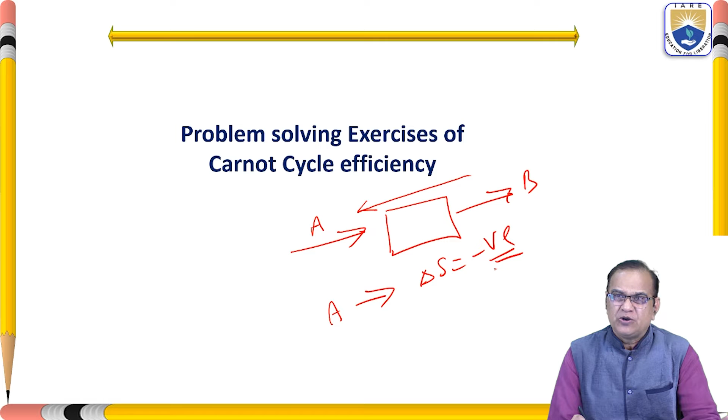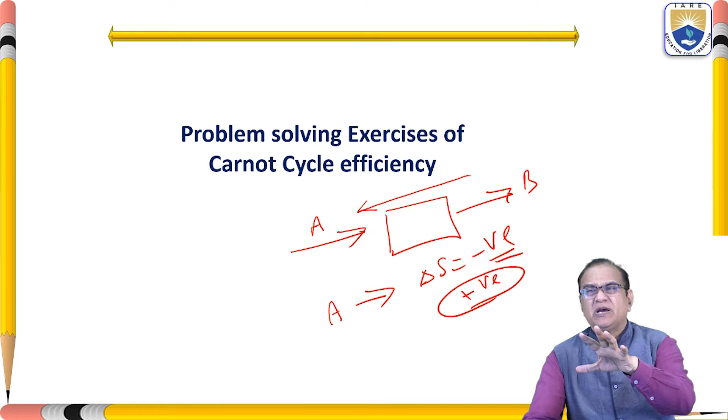So this we have seen with the help of the numerical, that the process was not possible from A to B, but it was very much possible from B to A. In this way, we have seen it in our previous lecture.

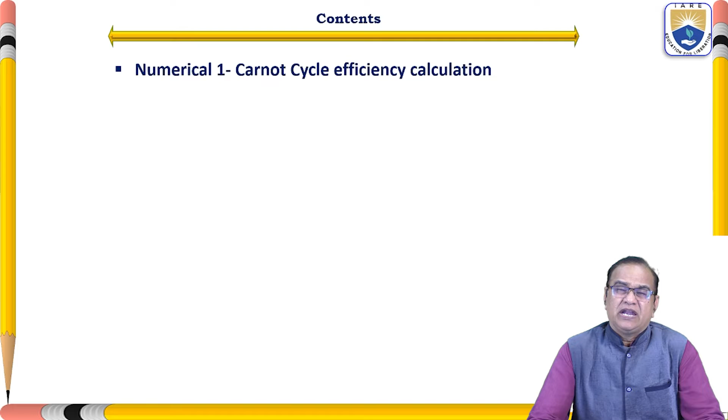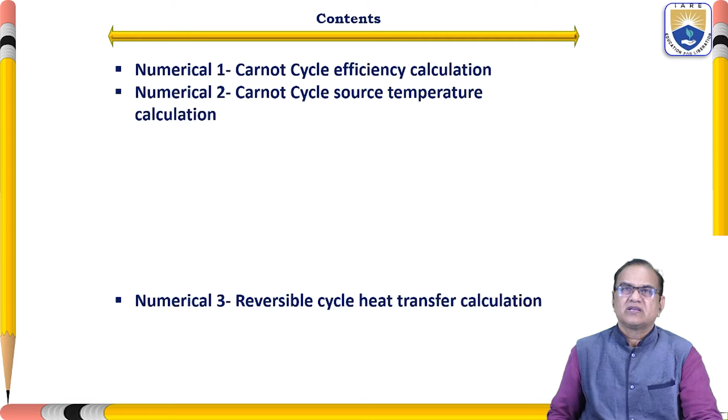In today's class, we are going to discuss some numericals again. Numerical number 1 is about Carnot cycle efficiency calculations. Numerical 2, Carnot cycle source temperature calculation. Numerical 3, reversible cycle heat transfer calculation. Numerical 4, refrigerator coefficient of performance calculation.

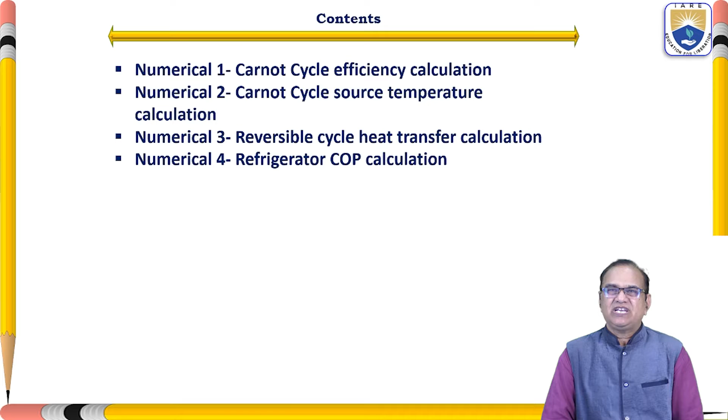So here we have the Carnot cycle for the engine and the Carnot cycle for the refrigerator. And we will see how these things are varying, and very interesting thoughts will be coming up in this lecture. Hope you will enjoy and stay tuned for this lecture.

So this is numerical number 1. An engine works on a Carnot cycle; it rejects 30% of the heat it absorbs from the source. The sink is at 25 degrees centigrade. Calculate the source temperature and the maximum efficiency. Okay, so it is very interesting. So this is the source and this is the sink here.

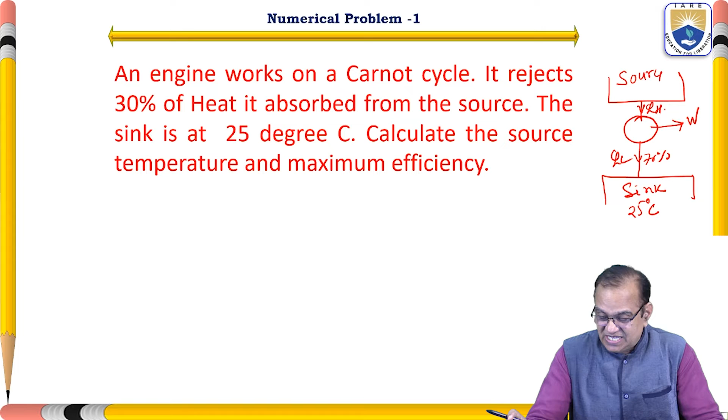So we have to calculate the source temperature and the maximum efficiency, assuming a Carnot cycle. So first we will see the diagram again. This is the source. Taking the heat from the source is called QH, and this is the engine. This is QL, and the sink is given as 25 degrees centigrade. So for the Carnot cycle, we can write that QL by QH is equal to TL by TH.

So given QL is equal to 30% of QH. So QL is equal to 0.30 of QH. TL is equal to 25 degrees centigrade plus 273, so you will get 298 Kelvin. TL is given. So here we can see that QL by QH is equal to 0.3.

So QL by QH is equal to 0.3, which is equal to 298 divided by TH. So TH is equal to 298 by 0.3. We will get 993.3 Kelvin, or 993.3 minus 273.

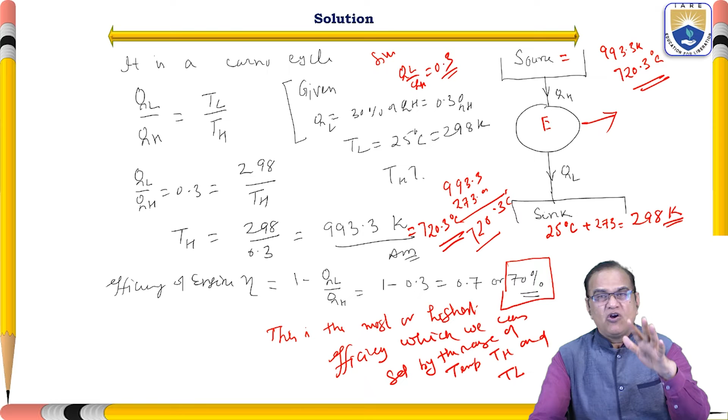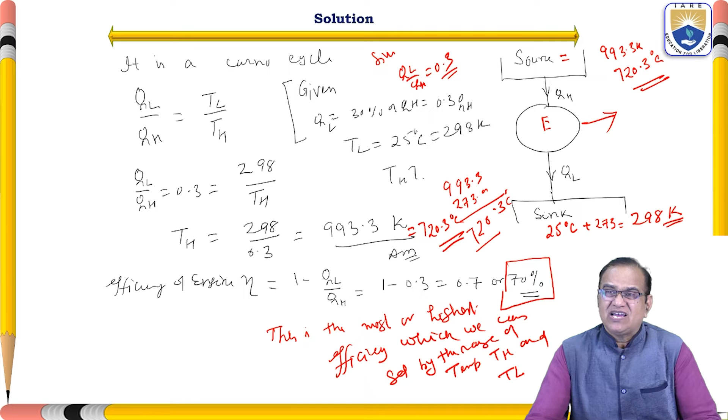So that is the Carnot cycle which explains the maximum efficiency. So we have got, with the help of the highest temperature of the source which is supplying the heat to the engine and the lowest sink, the efficiency of this engine as 70%.

Now we will see numerical number 2. In that, a heat engine operates between a hot reservoir at 500 Kelvin and a cold reservoir at 300 Kelvin. It absorbs 3500 joules and rejects 2500 joules of heat. Calculate the work done, efficiency and the maximum possible efficiency of this system.

So here we have got TH, the source temperature, as 500 Kelvin and TL, the sink temperature, as 300 Kelvin. It absorbs 3500 joules and rejects, so QH and QL are also given. TH, TL, QH, QL. Calculate the work done. So we have to find out how much is the work done.

So if you see here, this is the sink, this is the source at 500 Kelvin, this is TH, and TL is equal to 300 Kelvin. This is QL, which is given as 2500 joules, and this is QH, 3500 joules, and the work done. First, we have to find out how much work is done by this system, then the efficiency

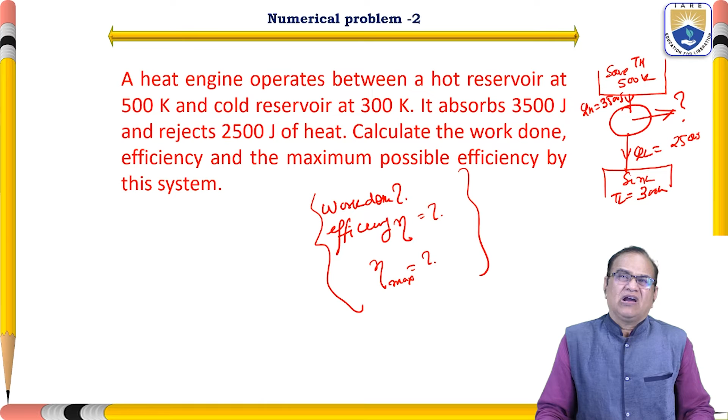eta of this system, and the maximum possible efficiency, eta maximum. These things we have to find out with the help of the Carnot cycle or the Carnot principle. So here given TH is equal to 500 Kelvin, TL is equal to 300 Kelvin, QH is equal to 3500 joules, QL is equal to 2500 joules. So for this heat engine, what is the work done, eta and the maximum efficiency?

So applying the first law of thermodynamics, the cyclic integral of dQ is equal to the cyclic integral of dW, or sigma dQ is equal to sigma dW. So QH plus QL is equal to W. So here we can write QH minus QL, because QH is entering, so it is positive, and QL is leaving, so it is minus. So QH minus QL is equal to W.

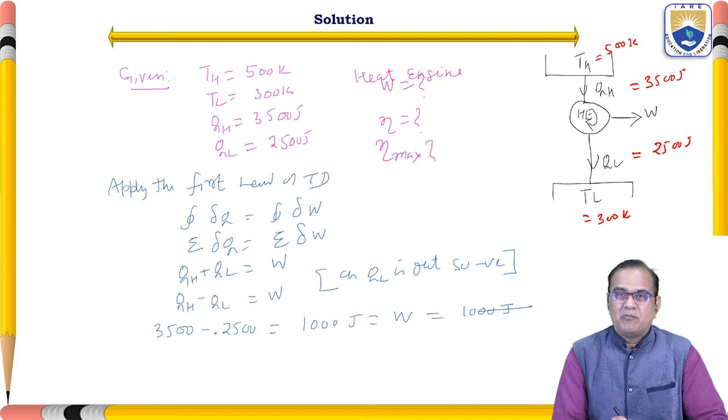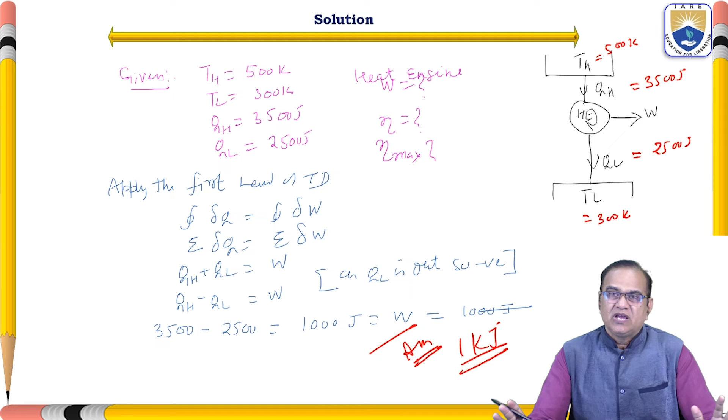So 3500 minus 2500 is equal to 1000 joules, and this is the work done. That is the first answer. We got 1000 joules or 1 kilojoule. That is the work done. Directly, very simple. But we should know the concept of how we should start the process.

Now we have to find out the efficiency of the system, which is equal to the net work done divided by QH. Net work done is QH minus QL, by QH. So this is equal to 1 minus QL by QH. So we can see here that QH minus QL is equal to 1000 and QH is equal to 3500.

So here 2, here is the 7. So here we will get 0.2857. This is 28.57% of efficiency we got. So this is the efficiency for the given condition. But how to find out the maximum efficiency?

Okay, so now find out the maximum possible efficiency for the reversible engine between the given temperatures TH and TL. So this maximum efficiency is equal to W by QH. So QH minus QL by QH is equal to 1 minus QL by QH, 1 minus TL by TH. So 1 minus 300 divided by 500. So 1 minus 3 by 5. So you will get 0.4 or 40%.

So maximum efficiency is 40%, but the actual efficiency we got is 28.57. So that is the difference. So for the engine, the actual efficiency is 28.5, but the ideal efficiency is 40%. And so here we can see the TH for the Carnot cycle, QH. This is a reversible heat engine, and here is W, QL, TL. So delta W is equal to delta Q. So W is equal to QH plus QL.

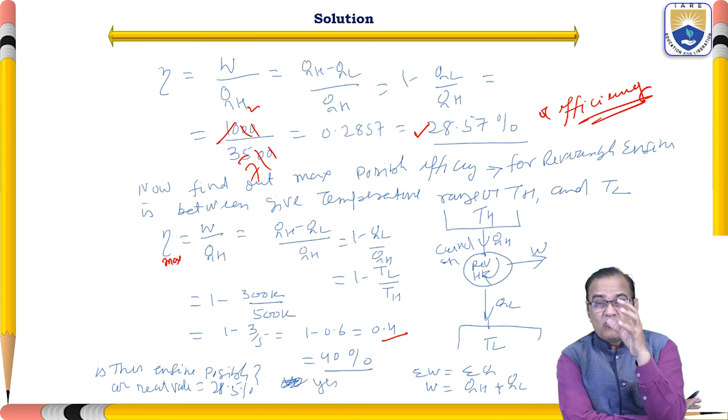So we have got that the maximum efficiency will always be 1 minus TL by TH, but the actual work done is equal to 1 minus QL by QH. That we have to take care of. For taking the work done, temperature is not important, heat is important. But for the Carnot cycle, the given range of TH, the high temperature, and the low temperature we have to consider. And the Carnot cycle is used for this purpose.

Now I will go for numerical problem number 3. In the previous example, we have seen how the maximum efficiency and the working or net efficiency matter. If you want to find out the net efficiency, you have to take the heat absorbed and heat rejected. But if you want the maximum efficiency, then you have to use the Carnot cycle, and in the Carnot cycle, your high temperature and low temperature are very important. So eta maximum is equal to 1 minus TL by TH, where TL is the lowest temperature and TH is the highest temperature of the given system. That we have to take care of.

Don't confuse that both are the same. Both will not be the same. It is not possible for any engine to have the maximum efficiency like a Carnot cycle. So if you are getting more than the Carnot cycle or very near to it, it means there is some problem, you have done some calculation wrong or something you have missed. Only then will you get equal to or more than the Carnot cycle. So again you revisit, rethink, and redo the work. So I am going for my numerical number 3.

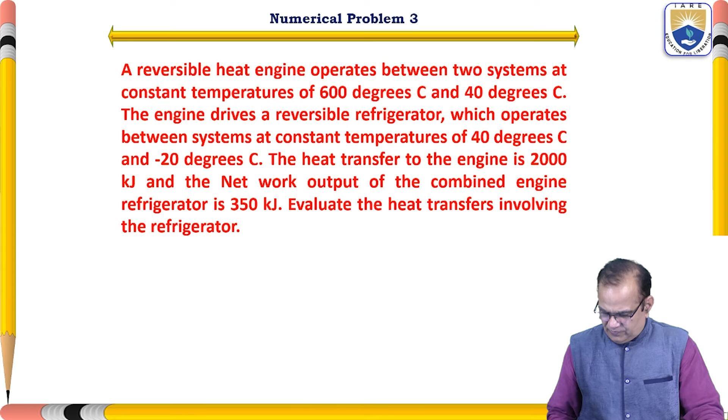The engine drives a reversible refrigerator which operates between systems at constant temperatures of 40 degrees centigrade and minus 20 degrees centigrade. The heat transfer to the engine is 2000 kilojoule and the net work output of the combined engine and refrigerator is 350 kilojoule. Evaluate the heat transfer involving the refrigerator. So, it is a combination of engine and refrigerator. You can see I have drawn this diagram. It is given that TH of the engine is 600 degrees centigrade plus 273, so 873. Here 873 is the source.

This source is giving heat to the engine. This is the QH. From this heat engine, work output is 350 kilojoule. And from here, QL, and the heat sink, it is rejecting at 313 Kelvin, means 40 degrees centigrade. So 40 plus 273, 313. It is a heat engine. It is a reversible heat engine.

Now, if you see here, it is minus 20 degrees centigrade, so it is 253 Kelvin, and here it is QL. Okay, and this is the refrigerator, and this is giving heat to the sink at high temperature. So these things are given here.

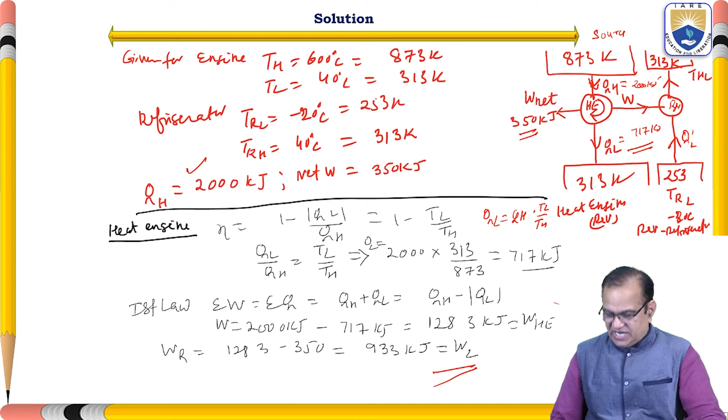Now, for the engine we have done; for the refrigerator, sigma Q is equal to sigma W. So we can write QRH plus QRL is equal to WR. We need proper sign convention. So WR is equal to QRH minus QRL. So W we got 933 is equal to QRH minus QRL.

For the reversible refrigerator, QRH by QRL is equal to TRH by TRL, 313 by 253, 1.24. So here we can write that 933 is equal to 1.24 QRL minus QRL, so QRL into 1.24 minus 1. So you will get QRL is equal to 933 by 0.24, and QRH comes to 4820.5 kilojoule.

So for the refrigerator, we need 4820.5 kilojoule. So this is very interesting: 4820.5 kilojoule of heat has to be rejected to make minus 20 degrees centigrade of temperature. A very huge amount of heat has to be rejected by the refrigerator.

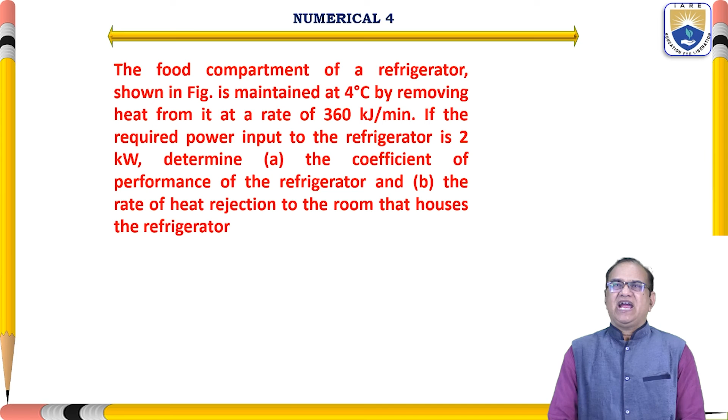Now I will go for the next numerical, number 4. The food compartment of a refrigerator shown in the figure is maintained at 4 degrees centigrade by removing heat from it at a rate of 360 kilojoule per minute. If the required power input to the refrigerator is 2 kilowatt, calculate A, the coefficient of performance of the refrigerator, and B, the rate of heat rejection to the room that houses the refrigerator.

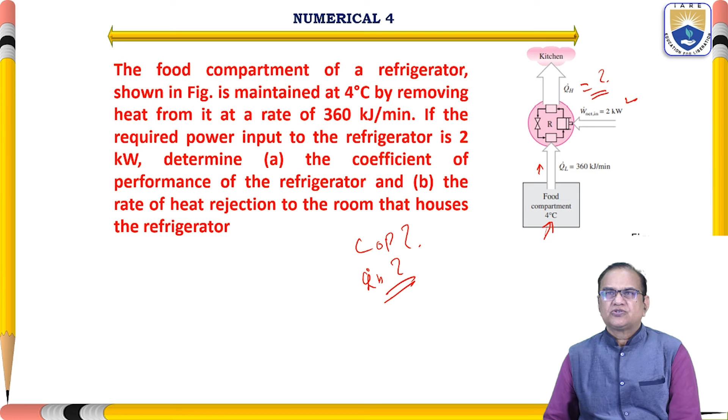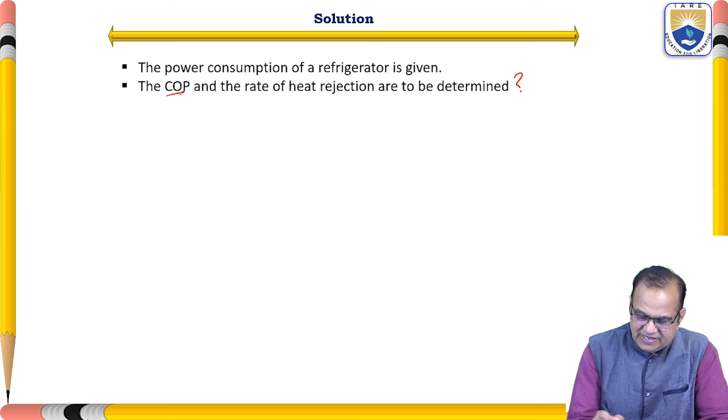So COP, what is the COP, and the rate of QH. These two things we have to calculate. So we can see here in the solution that the power consumption of the refrigerator is given, and the COP and the rate of heat rejection are to be determined. So this COP and the heat rejection have to be determined.

For the coefficient of performance of the refrigerator, we have seen the equation that the coefficient of performance is equal to Q dot L by W net. So Q dot is given, 360 kilojoules per minute divided by 2 kilowatts, with 1 kilowatt equal to 60 kilojoules per minute. So you will get here 3. So the COP is equal to 3.

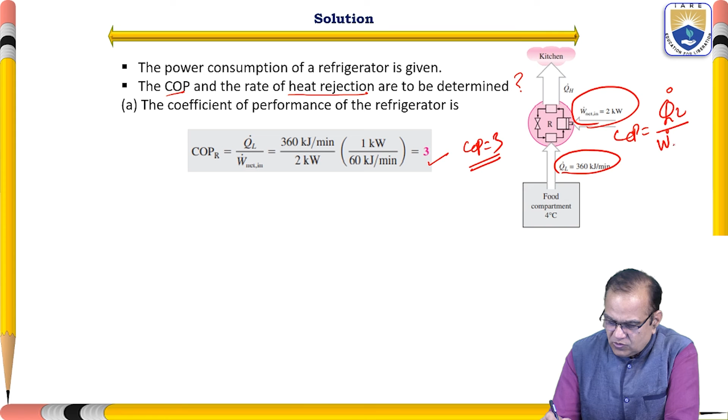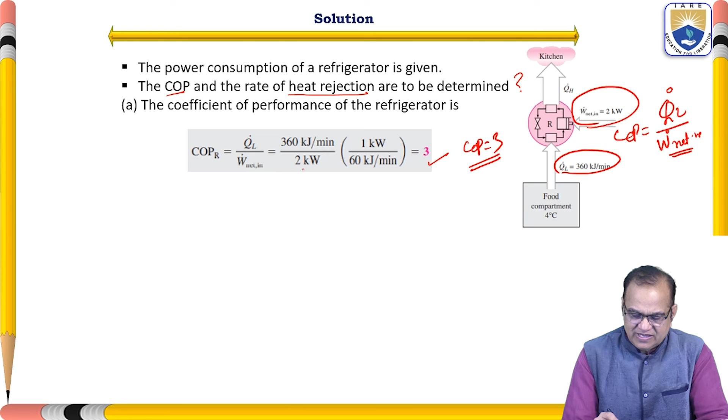So here, the COP is always this divided by this. If you want the COP, it is always QL, which is the required effect, divided by how much you give, that is the W net in. This is the COP of the refrigerator. So just directly put the value, convert the units, and you will get 360 divided by 120, so you will get the answer 3.

Now, 3 kilojoules of heat are removed from the refrigerated space for each kilojoule of work supplied. So what is the meaning of this? It means 3 kilojoules of heat are removed from the refrigerator for each kilojoule of work supplied. So this COP of 3 means for each kilojoule you supply, 3 times that heat will be removed. Okay, that is the meaning of the COP.

Now the second part: the rate at which heat is rejected to the room that houses the refrigerator is determined from the conservation of energy relation for cyclic devices. So here we can see that Q dot H is equal to Q dot L plus W in. So it is 360 kilojoules per minute plus 2 kilowatts into 60 kilojoules per minute. So you will get 480 kilojoules per minute. So the value of QH, the rate at which heat is rejected, is 480 kilojoules per minute.

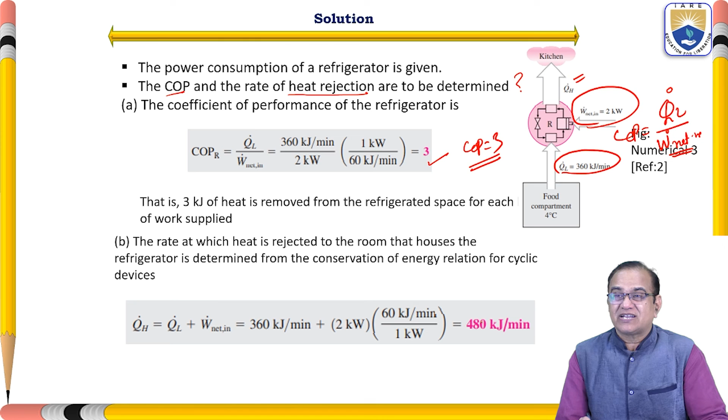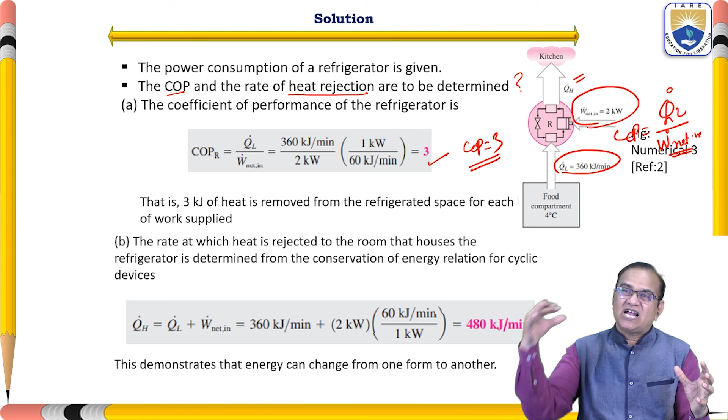That we have to understand. This demonstrates that energy can change from one form to another. So energy is conserved: this work is added and the 360 is also added. If you add both, you will get QH. That much heat is rejected, including that removed from your food compartment. So that is the meaning of this system.